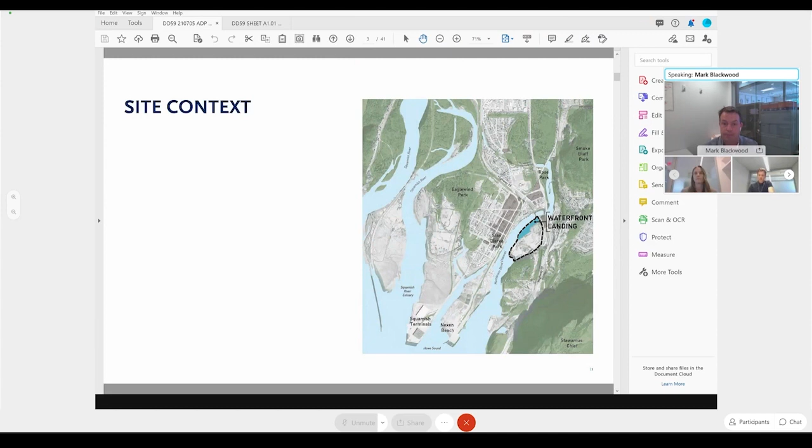Just for some further context, the Mamquam Channel is to the right here in blue, part of the overall community. It envisions an extensive North Park right now, adjacent to the Mamquam Channel, buffering the development to phase 3A, which is in this zone. Phase 2 starts to define the edge of the North Park, phase 3A will continue that definition, and phase 3B and C will complete that edge. This is a very beneficial amenity to the overall community, offering opportunities for outdoor amenity and play for residents of Waterfront Landing and beyond.

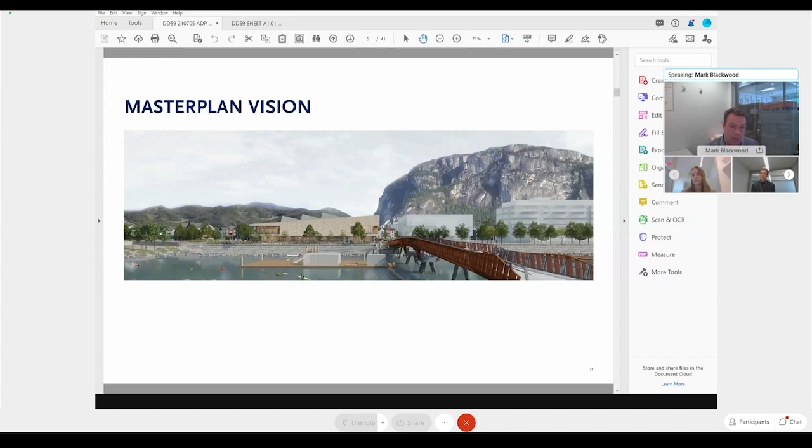Further down on the site, the master plan also envisions a commercial center or village down by the water, with the idea of connecting this development across to downtown - a valuable pedestrian connection for accessing amenities in the larger Squamish area. Phase 3A, which we're talking about, will be just off to the left here.

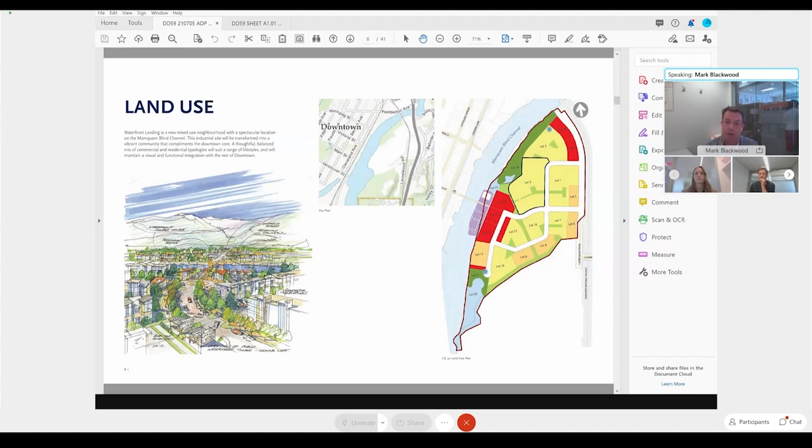Just a little touch on land uses. The diagram essentially illustrates the various uses, red being more the mixed-use type zones, the peach color more the mid-rise type developments, and the yellow more the low townhouse, duplex style of development. There's a lot of mixed use down by the commercial area, and the bridge connection which comes across into downtown.

As mentioned, part of the master plan envisioned how connectivity is going to work through the site. With each phase, we're considering connectivity, both major connection points through the site to the village, but also all the tertiary ones that weave through the various phases of development. We'll touch on how that's been addressed in phase 3A here.

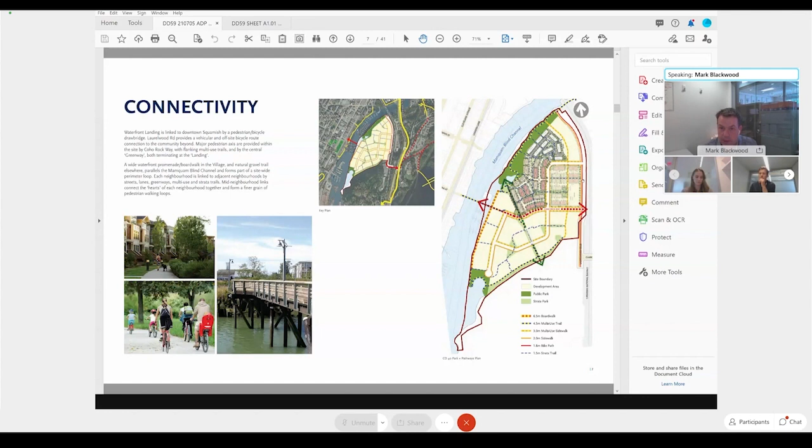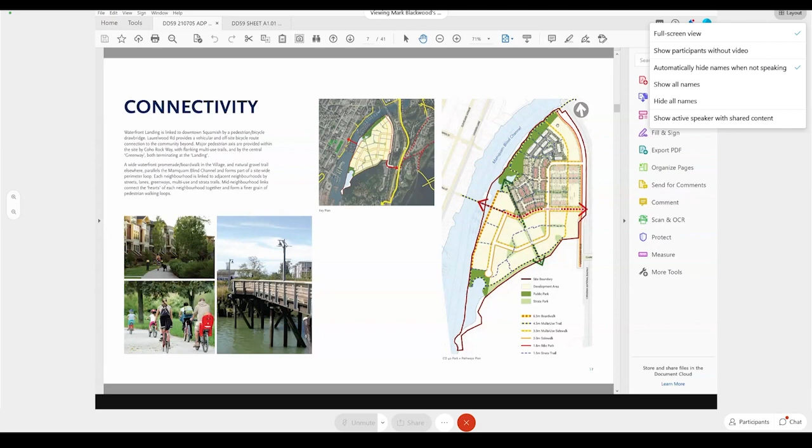For orientation, we have phase 1, phase 2 currently under construction, and the topic of today, phase 3A, which is this smaller parcel right here. The future apartment buildings will be in this zone.

From the early days of the master plan, there were essentially four quadrants envisioned. One is the Woods, comprising phase 1, phase 2, and phase 3. The idea is that each neighborhood would have some distinction in terms of architectural character, but ensure they speak together as a united and cohesive community.

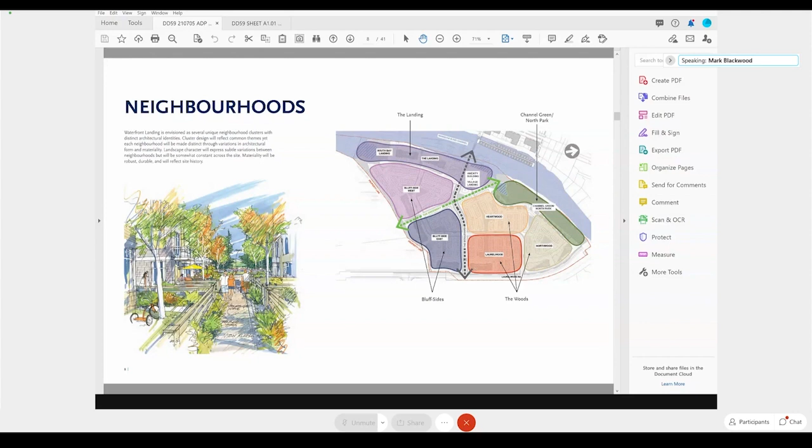There's additional neighborhoods - Bluffside East and Bluffside West - which create opportunities for uniqueness in architectural form and character, while anticipating ways to make sure the community holds together in terms of form, character, connectivity, and public outdoor space. The fourth is the Landing, which comprises a lot of the commercial village, residential, and a large amenity building planned for this location at the heart of it all. So there's some rationale behind how the overall community is intended to come together, thinking about different precincts within the overall site plan.

This slide describes those various precincts, and what we're talking about here is the Woods neighborhood, which comprises phase 1, 2, and 3. It touches on a lot of what I just spoke about, but also some design influences of the Woods neighborhood - this idea of the former sawmill, lumber and log storage, and that slightly more industrial aesthetic that goes along with a previously industrial site.

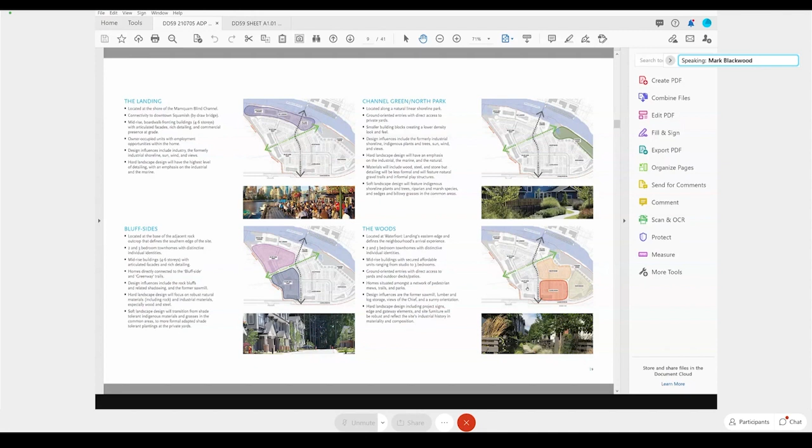As we go through the slides, you'll see the revised plan where we've introduced wider side-by-side units at both ends of building 9 and both ends of building 8, which allow for side-by-side garages. The other plan adjustment is to the internal strata road, which now allows full-length driveways for buildings 5, 8, and 9.

That effectively means the only units with interior tandem garages are buildings 1, 6, and 7. The remaining units already had full-length driveways. That was one plan change you'll see, especially when we get to the landscape plan.

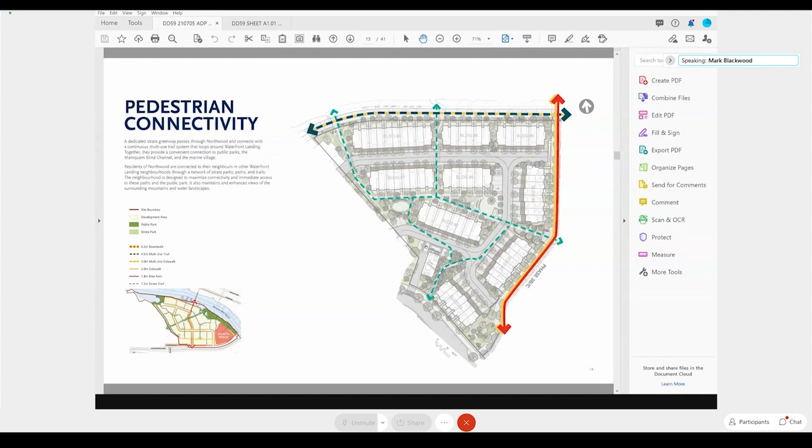Just highlighting that pedestrian connectivity—this one has been modified to create a connection through here. That'll show up better in the landscape plan. I've already really spoken to this one.

The other point to discuss is color distribution. As mentioned, we're carrying forward a similar color palette to the previous phases, which goes back to this idea of creating connectivity in the Woods neighborhood. However, we're creating some distinction as well.

And because it's a smaller development, we also didn't want to overdo it in terms of the number of color variations—at some point we begin to lose the architectural intent of the design.

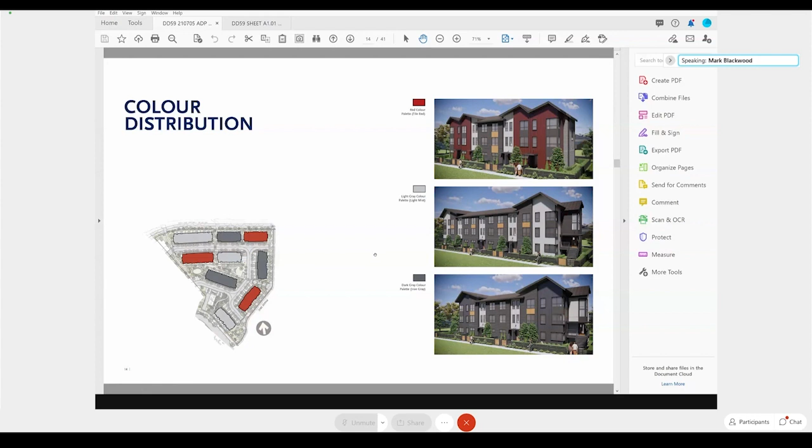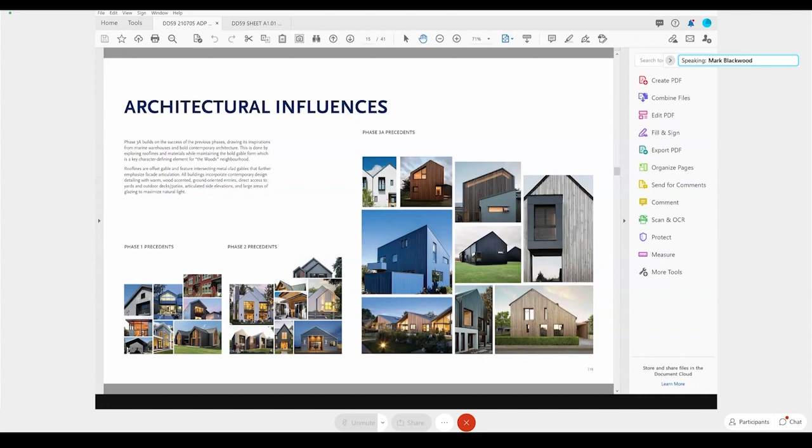To further touch on the design evolution: phase 1's gable roofs that are symmetrical were a predominant feature on phase 1 and phase 2. Phase 2's big distinction from the previous phase was the larger carve out of windows and paneling. Now in phase 3A development, you can begin to see these layered offset gables, carrying through the industrial language of the corrugated metal and the punched openings, and introducing more of a panelized siding, which is a new material we're using more extensively on this phase.

Just similar comparisons of how the design is evolving, and I think it's quite clear that there is distinction, but there's also some cohesiveness in terms of these different communities residing side by side, not necessarily wanting them to be too drastically different.

One of the other points that was raised was buildings 1, 6, and 7, which are adjacent to the Central Park, and some concern of whether there's enough feeling or frontage or sense of entry off of the park.

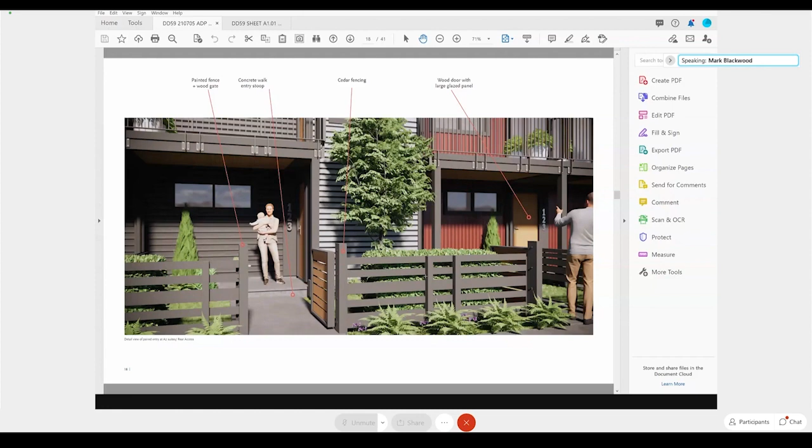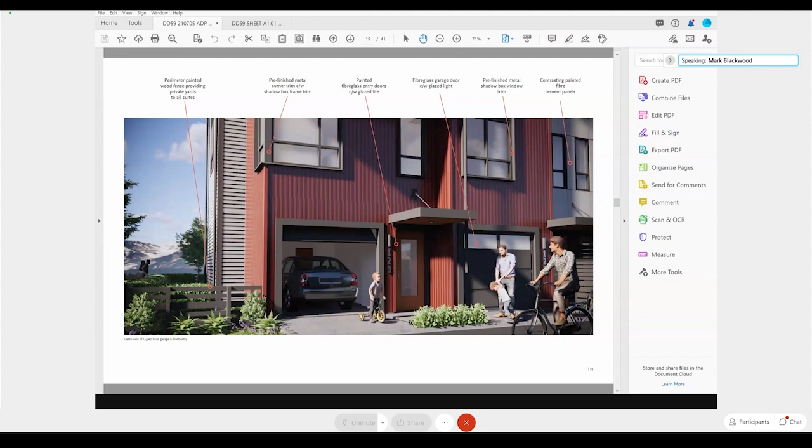On the opposite side, with the reduced driveway length, we can still create a transition from the front door to the curb edge. As I'm sure you can understand, if we were in a zero condition where we had zero driveway apron, we would pretty much be stepping out of the front door onto the strata lane, which I believe is a bit problematic.

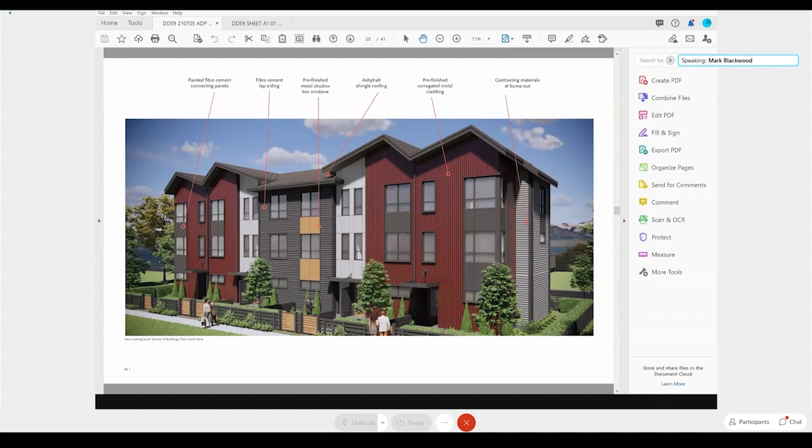Just some various images of various buildings and how the material palettes are being handled. I think in many instances there's a fair amount going on in terms of variation - it does vary from building to building, but I'm cautioning against too much additional color, as I think we would lose the intent of the overall design.

This is a view of Building 5, the rear of Building 5, where the color palette is a little bit more muted, but still varied in terms of siding color tone and some pops of color.

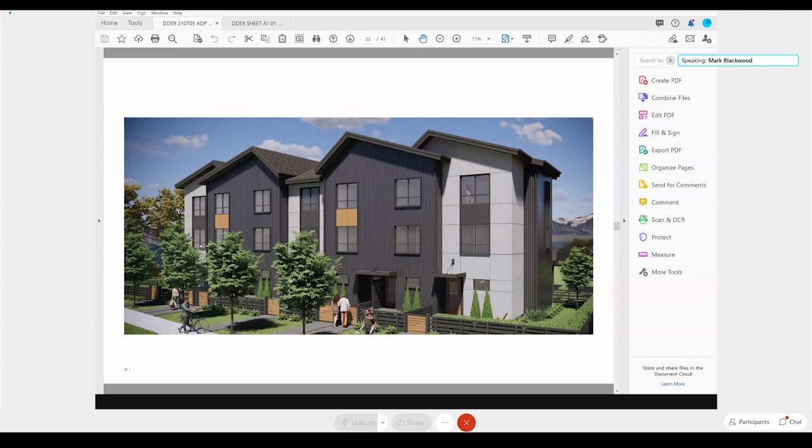This one here - sorry, just go back - we have building number 2. This illustrates the darker corrugated metal and the introduction of a more painted fiber cement, defining the ends or the field of the building, and really using the corrugated metal as the pop-out feature. Just the rear.

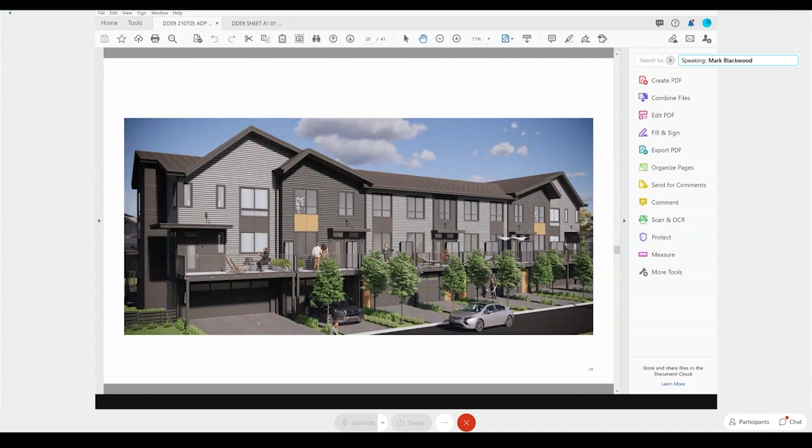Just various color palettes, I'll scroll through these. This illustrates - so this is a view of building number 9, where we've added the wider units. You can see the side-by-side garage, full-length driveways, so now we're trying to address some of those concerns over too much tandem parking.

And as mentioned, the housing diversity piece includes a fair number of unit plans, ranging from just over 1,000 to about 1,500 square feet. The idea, as Paige mentioned, is to offer a smaller unit type to address some market concerns, and also create a varying degree of 2 and 3 bedroom and den type units.

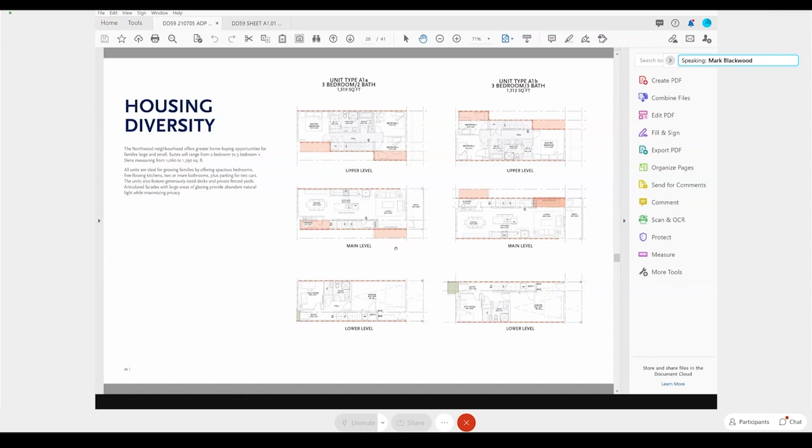So all these are in your package. And you can see here, these are the only tandem units, which are in buildings 1, 6, and 7. So 2 parking stalls at the lower level, and then the entrance off of the strata lane.

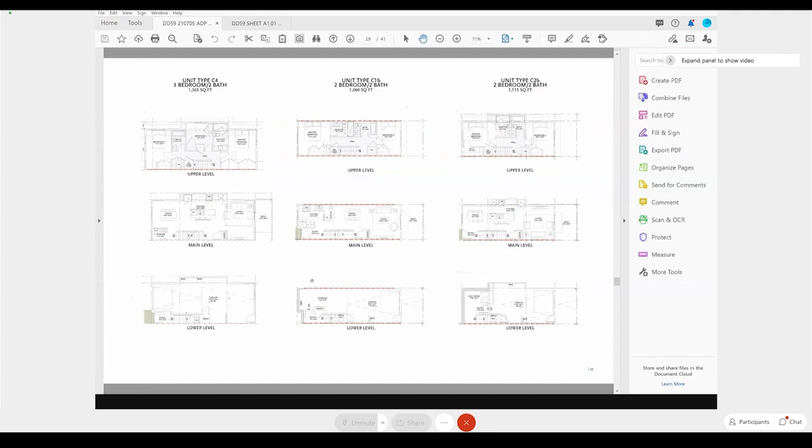I'm just going to scroll forward quickly before landscape jumps in, to highlight the connectivity piece I was talking about. As we saw in the previous plan, this pathway was extending to this intersection. That's since been modified to come in front, since there's an existing pump station here. So now we're keeping people off of the Strata Road, with just one point of crossing to the park, creating a nice convenient access out to the North Park here.

In this version, you can now see the wider units on the ends of building 9 and building 8, with side-by-side garages. And now you can see all of these buildings have full-length driveways. Buildings 6, 7, and 1 now have very much reduced driveway aprons, more or less non-existent, being about 4 feet. So that addresses concerns about anyone trying to park in those locations.

And that puts the decks on the park side, which creates some nice overlook and eyes on the public park space in the middle. So yeah, just wanted to highlight those bits on the site plan. I'll go back and maybe let landscape take over.

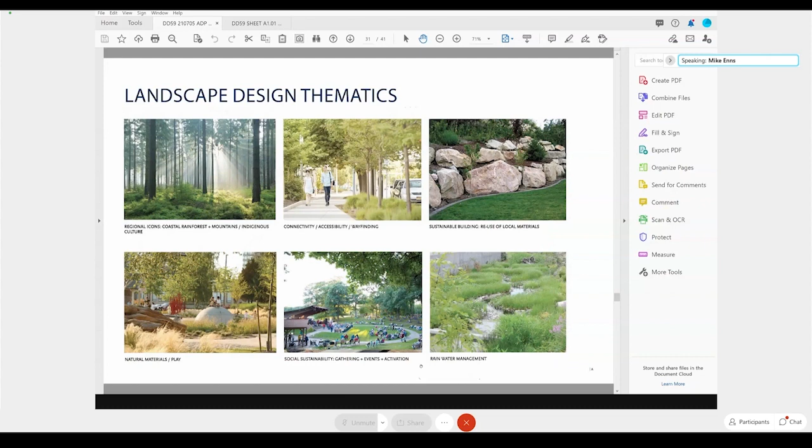So, Mark, if you just keep going through there. Mark did a good job highlighting connectivity, permeability, lots of options to move around. Generally, the approach to landscape was lush, evergreen, native planting palettes in between the building masses in and around the mews, and the public realm is anchored by three key spaces: the central greens, the pocket park, and the little forest walk down on the south edge.

We talk a bit more about those later on. And obviously the perimeter aspect ties into the neighboring waterfront park, as well as the Greenway Trail, allowing a good amount of privacy between those public spaces and the private units, but also permeability through those sites with lots of different access points.

Next slide, Mark. Maybe I'll just highlight as well, while we're here, Mike: we have a staired access to the park here, but one of the important elements of the site plan and the multi-use path was an accessible entrance into the site at this lower portion as well, ensuring we have a good accessible path of travel from the phase 3B and C sites and the North Park into the 3A development.

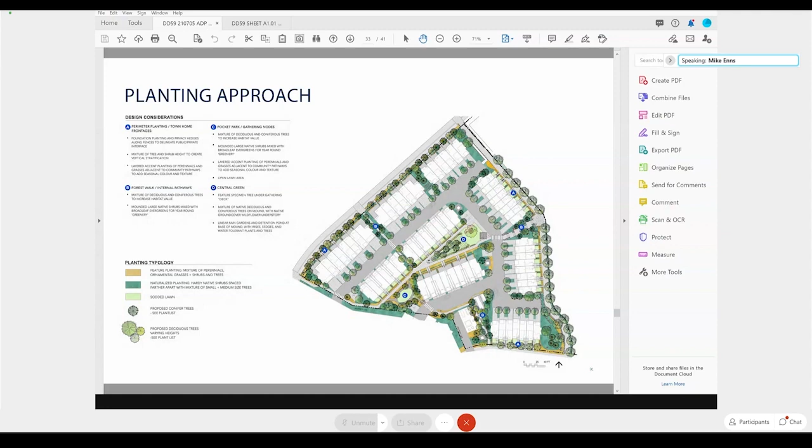Plant list: in general there's a good mix of native shrubs, some hardy shrubs that do very well in the region. We have some drought tolerant plants as well, and this has been vetted for essentially bear proofing, so most of the plants here won't attract unwanted visitors in and around the site. That gives you an idea of our palette, a good mixture of deciduous trees and conifers with evergreen shrubs, perennial accents, and ornamental grasses.

Quickly, a couple of blow-ups of some components of the public realm, the amenity spaces. This is the reconfigured pump station area that basically takes you from the south edge of the site heading west along that pathway.

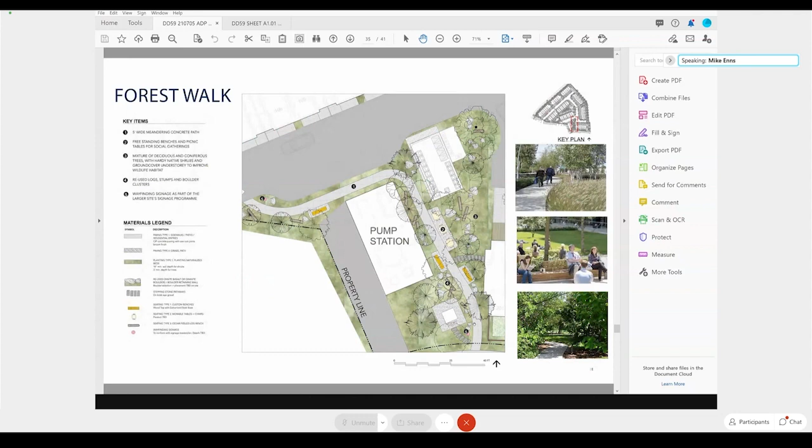Connecting to the waterfront park to the north. As Mark said, the pump station is there, and the garbage recycling kiosk was shifted to the right so we could have the pathway come through along the internal street. We thought this was a very cool opportunity to create a small forest walk with picnic and seating amongst a heavily treed area, with naturalized features such as logs—a neat little amenity as you proceed through these pathways and out along the west side to the waterfront park.

Continuing west and north, you'll come across the Pocket Park, really another little jewel along the pathway. It's a fairly unprogrammed, flexible green space—open lawn with perimeter seating and a heavy dose of native planting—just a place for picnicking, bringing your pets or kids, and having fun with unprogrammed flex play, but nothing permanent and no fixed playground equipment in this area.

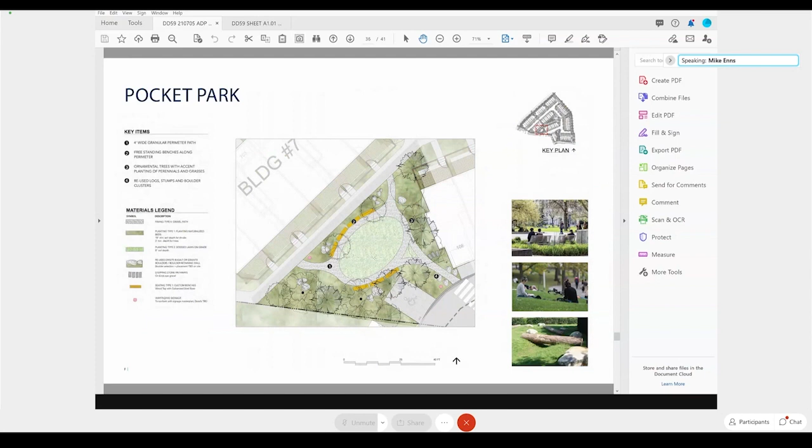Moving along to the central area, this is the social heart of the site. On the west side there's a built-up mound, and on the far west side there's actually a proposed little rainwater retention, seasonal pond, with some stepping stones over it and a little plaza.

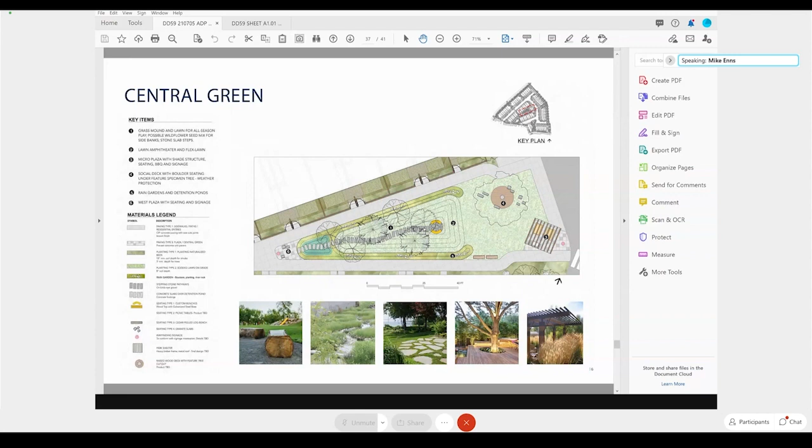Proceeding eastward, you go up the mound to a little lookout area that overlooks the social area on the east side of the park, with a grass amphitheater, a featured tree, sitting opportunities around the perimeter, terminating at a covered picnic barbecue area and some signage at the base of the grand staircase. There are connections on either side, and this would serve as the social heart and perhaps event space for the immediate community.

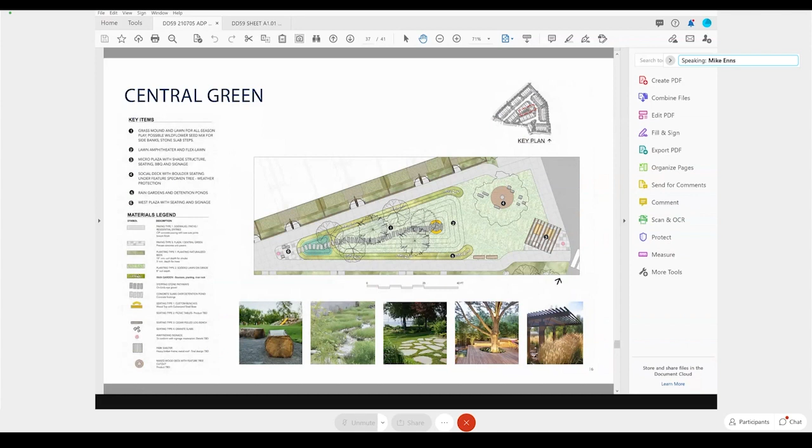So the mound and the lookout, then an amphitheater down and some free play—no fixed playground, as Carrie mentioned. The approach here was to keep things naturalized and let kids and people of all ages use the various elements, more of a natural, explorative approach to recreational design, but keeping things fairly flexible and passive, with room for events on the east side open lawn area.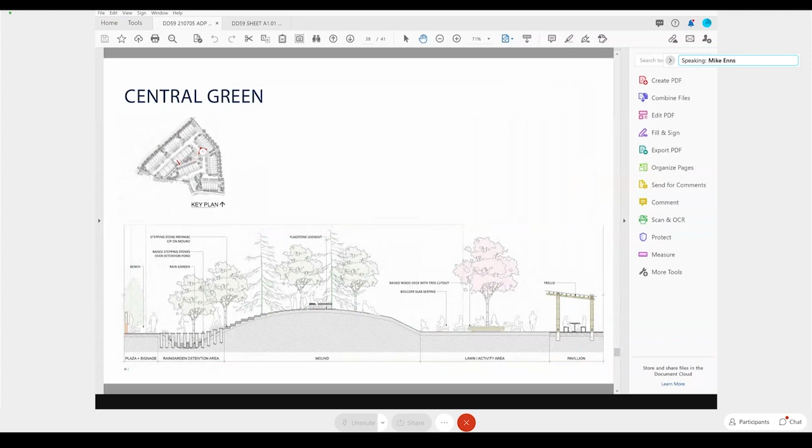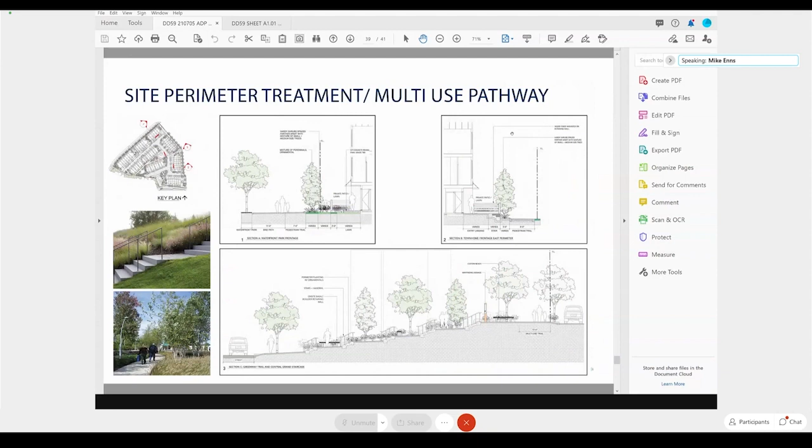Perimeter treatment, multi-use - so we've got a couple perimeter shots. I think the top left is the waterfront park frontage. We've got our multi-use path, and Mark showed some 3D perspectives of how that transition is from public to private, with a layered approach of plants and deciduous trees building up to the fence, and then the private patio spaces internally.

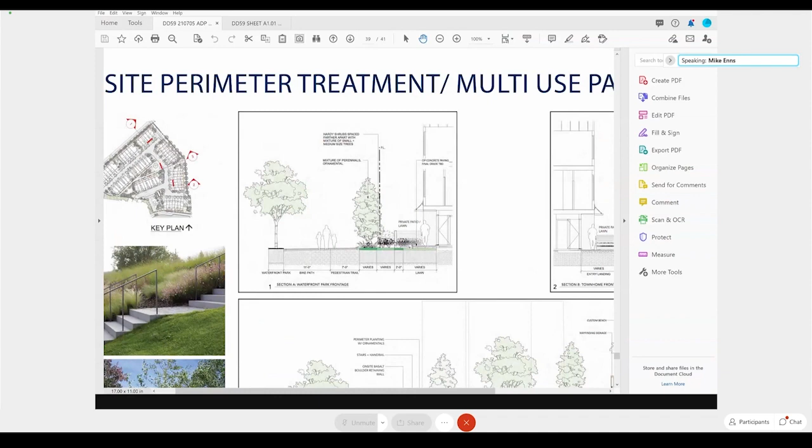I think the bottom section is the grand staircase coming from 3B and C on your far right, with the landing up top and some seating and signage, proceeding down to the central green commons area. The number 2 on the top right is another section through that Greenway Trail, stepping up to the townhome frontage. The townhomes are nicely nestled into that escarpment.

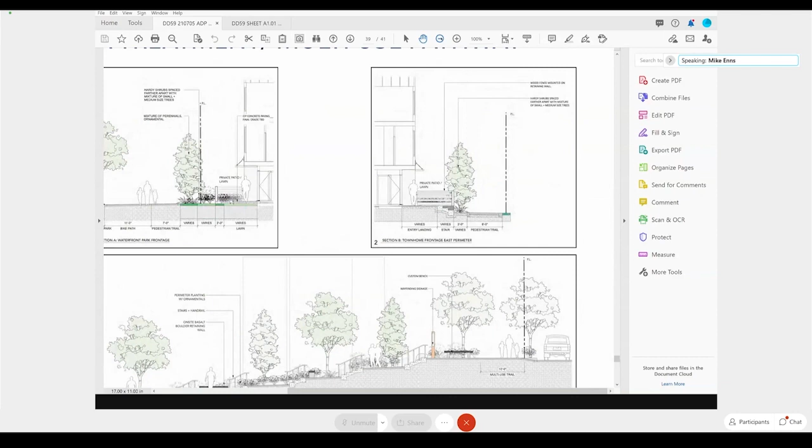Next slide. Furnishing palette - again, naturalized material: stone, wood, durable. A lot of these materials have shown to be good choices with great success in the earlier phases, and phase 1 is almost complete, so we're carrying over some of the materiality for continuity through the phases.

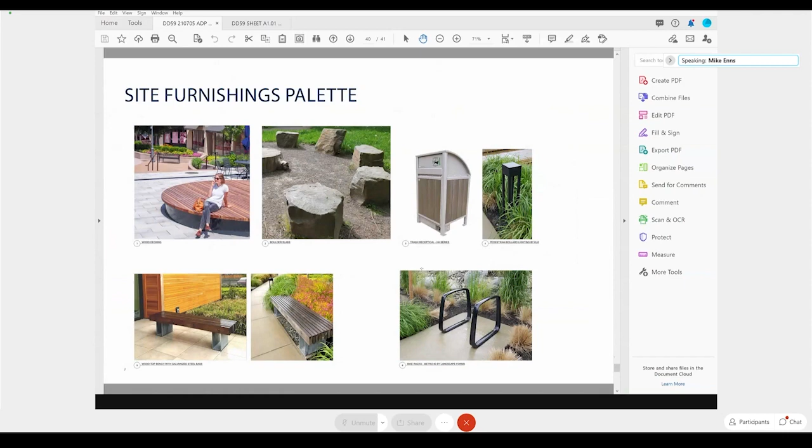Next slide, Mark. And lighting - Carrie, you mentioned the uplighting, and that has not been adjusted. We can certainly eliminate some of the uplights, especially for a project like this. The main strategy is at the entries on the perimeter, make things illuminated for safe wayfinding throughout the site, especially on the main staircase coming down from the right. In the landscape, it's probably best to highlight certain groves of trees or landscape elements, but not inundate it with uplighting. I agree with your comment, and we welcome any other comments on that, but that's our approach for now - to reduce this and be more selective with the lighting.

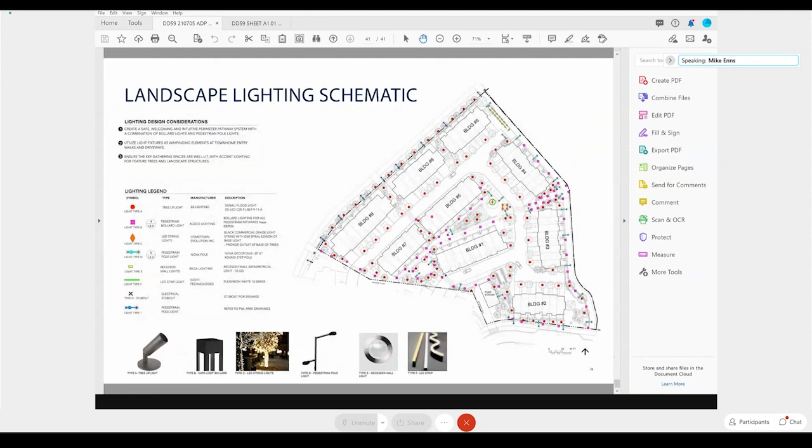I think that might be it - is that it, Mark? Yeah, that's the last slide. Okay, thanks.

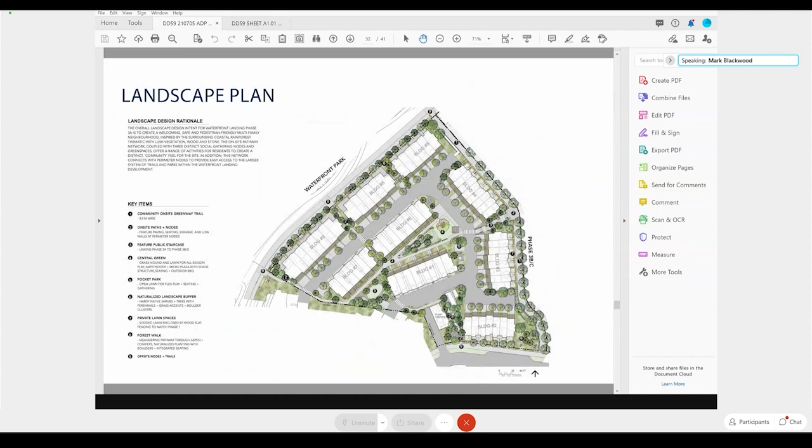How many units would you lose if you did provide adequate driveways? Well, I think the main thing - we've adjusted buildings 5, 8, and 9, so it really puts the squeeze on 7, 6, and 1. I think we have a building separation of about 25 feet right now at the pinch point. So rough math, if we're at 4 feet now and need to get up to 20, we're taking out 32 feet. So you're more or less probably losing close to a whole building - maybe 7 units out of 65.

This is a bigger question. You've had the benefit of seeing a couple other phases get built out and actually used - have you learned any lessons from the way those ones were used that have been incorporated into this phase?

Yeah, I think maybe that in part might be a question for BOSA in terms of how homeowners are giving feedback to them. But what's really in question here, as it relates to driveways, is just these 3 buildings in the middle. I think part of the concern about tandem garages is someone going to put one car somewhere else. On this site, we've limited the driveway length, so hopefully that won't happen - I'd be surprised to see someone park in a 4-foot apron. After that it becomes a bit of a strata policing issue, to make sure the visitor stalls are indeed being used for that.

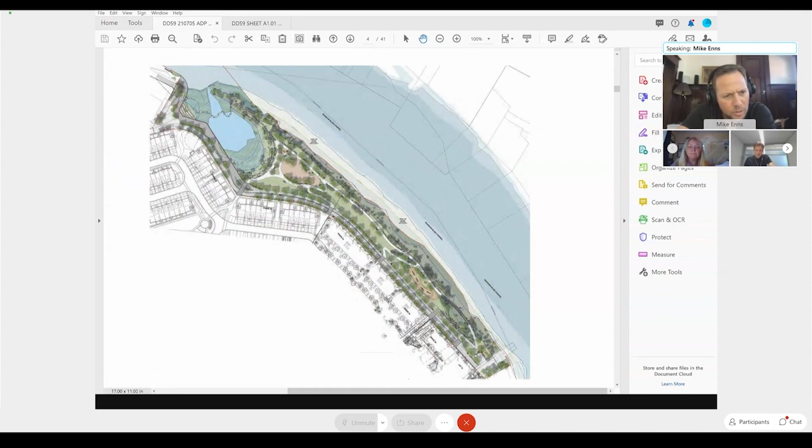Just in reference to the active play question, is there another playground in proximity to this subdivision? Is there one in one of the other phases that's relatively close, do you know? Well, we've got, I know in phase 3 BC in the plaza, there's some active play there, and I think there's a private daycare in 3BC. But Mark, maybe you can speak to that. I don't know the full design for that waterfront park or previous phases, so maybe Mark, I don't know if you know.

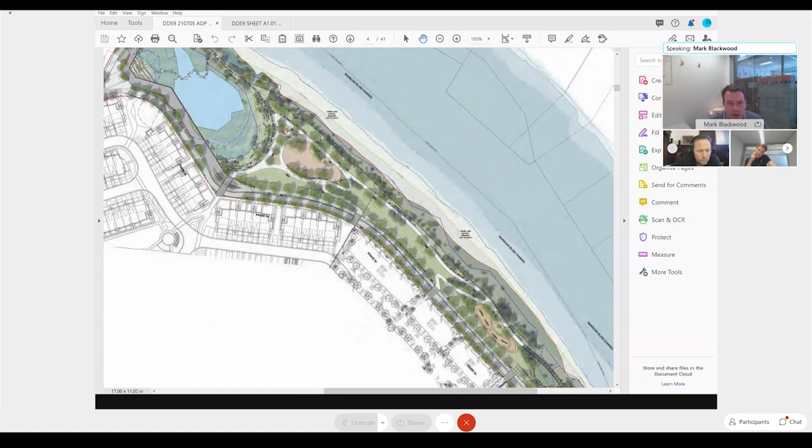Yeah, I'm not directly involved in the design of the neighborhood or the North Park, but I think Paige maybe you can speak to the latest updates on that. We included this slide just to illustrate that there is an extensive park right adjacent with various programmed elements in it. I'm not sure, Paige, are you able to speak to some of the programming there?

Yeah, so where your cursor was, that's exactly right, where there would be active play. And then there's opportunities for all ages at different locations throughout the park for different activities. So we're talking swing sets and things like that, climbers and other elements like that?

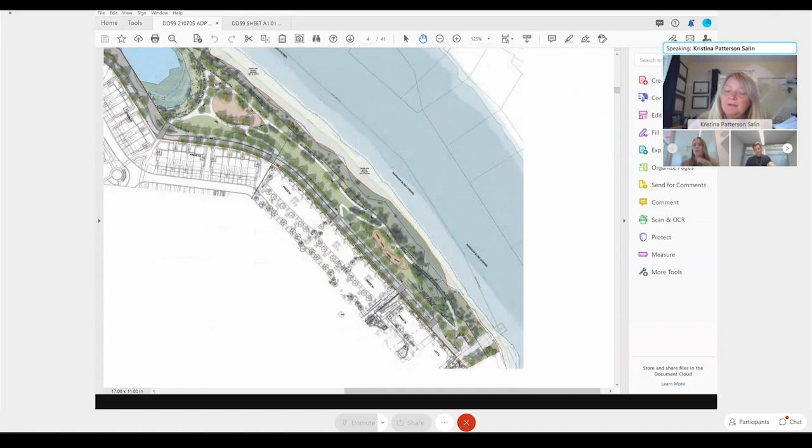Okay, and then the other question I have is the wood slat fence, was that utilized in any other phases or is that unique to this one?

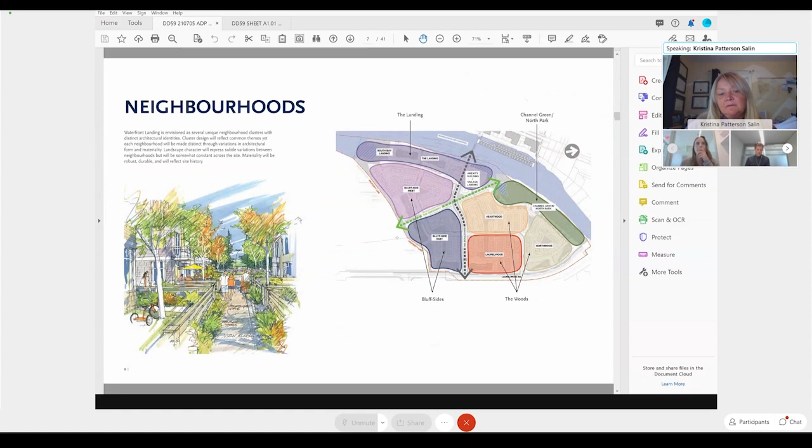That is being used in phase 2. Phase 2, okay, and it's been successful in terms of maintenance?

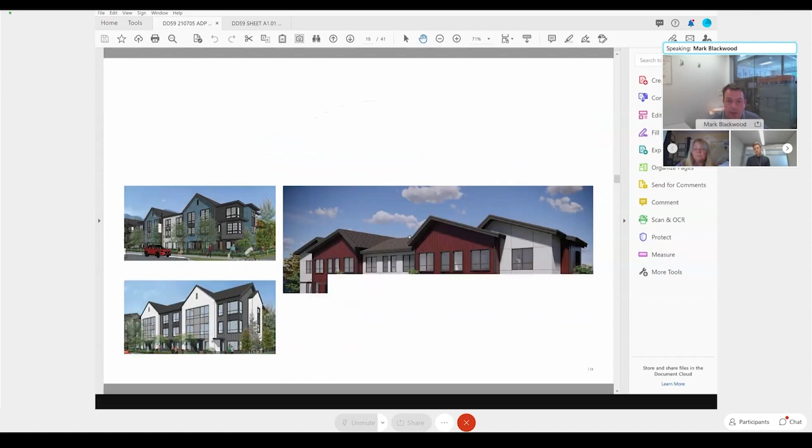Yeah, well, so phase 1 had kind of a solid paint, the dark gray, and then, sorry, I'm just going to scroll back to the site plan. And then on phase 2, we went with the solid painted dark gray for the fencing. And then on the gates, it's not a stain, it is a solid paint essentially. We didn't want to get into a condition where the stain holds up for a year or two and then they end up fading out and being a maintenance item for the strata. So we've used more of a solid paint on those gates, but still to give that sense of wood.

There are a couple ones that are complete already on site, and they turned out quite nice. Okay, that's it for me. Thank you.

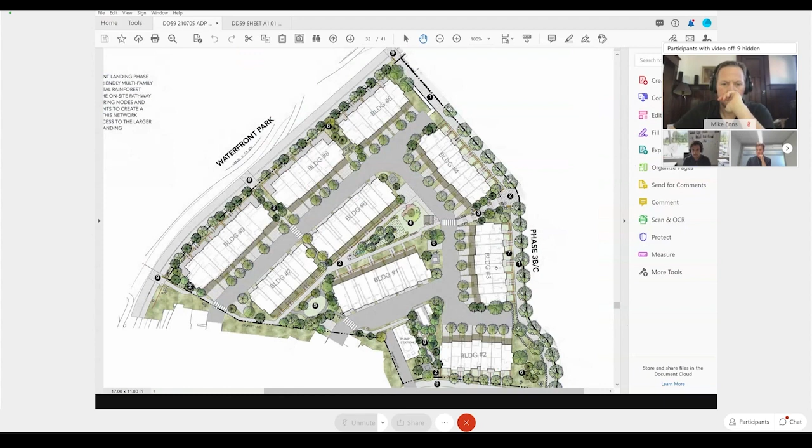I can't hear you. Hello? Is someone on mute? Mark might be muted, or having trouble.

Sorry, did you mean another 2 feet, Luke, so going from 4 to 6? Yeah, I'm wondering if there's any ability to get to 6 feet, and whether there's consideration to add some planting in there to deter people from parking right outside the garage door.

Yeah, we've gone back and forth quite a bit on these driveways, because per the bylaw it states 6 meters or no driveway at all. So we were trying to get as close to no driveway as possible while keeping a design and having some planting in there. To answer your question, we could go a bit longer on the driveway — it's possible, and we could definitely fit more planting in. It has been considered, but we're just trying to get as close to abiding by the bylaw as possible.

The other one would be the color considerations that planning asked us to comment on. A couple of the buildings on the rear were chosen to be a bit more of a muted palette. I was wondering if there was any particular reasoning for that, and if any other colors had been considered at the rear.

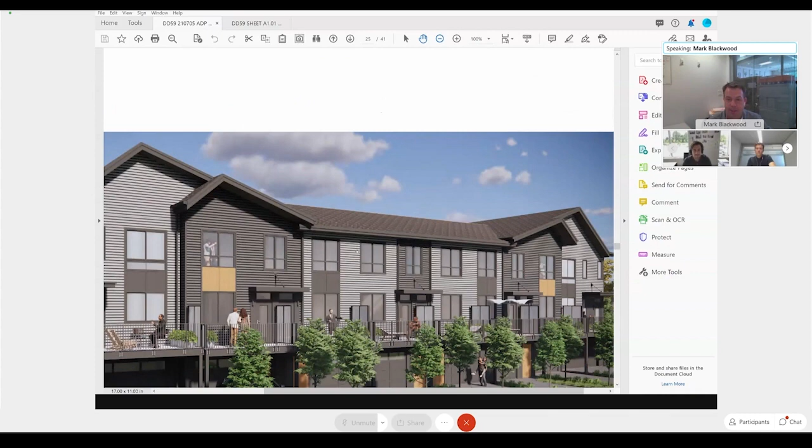Sorry, I lost my mute button there, so I couldn't unmute myself. Yes, that was intentional. If I go back to the rear view, the idea is to make sure that, although this building is kind of seen in isolation, as you'll remember from the color distribution diagram where we're proposing pops of red — the idea is to make sure those buildings really pop.

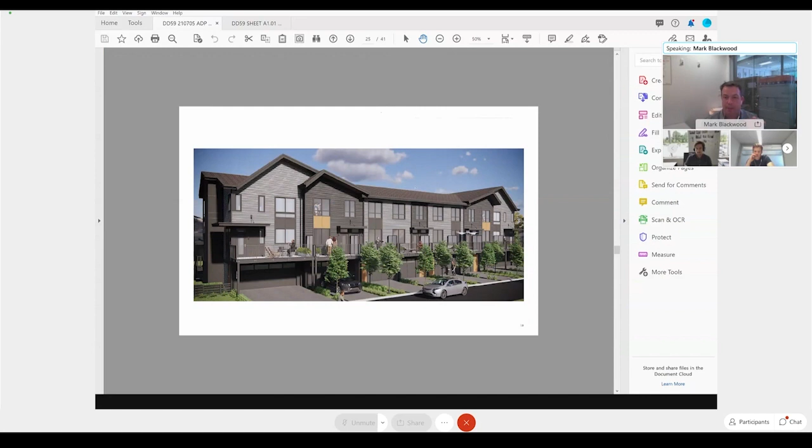I think if you begin to populate the site with too many colors, you lose that aha moment, that special moment of seeing individual buildings pop up against a slightly more neutral elevation. But we made sure there are still some different color tones, some smaller moves of color pops as well. Once you get the layering of landscape and the life that people bring to their balconies, it quite quickly becomes quite busy, so we didn't want to overdo it.

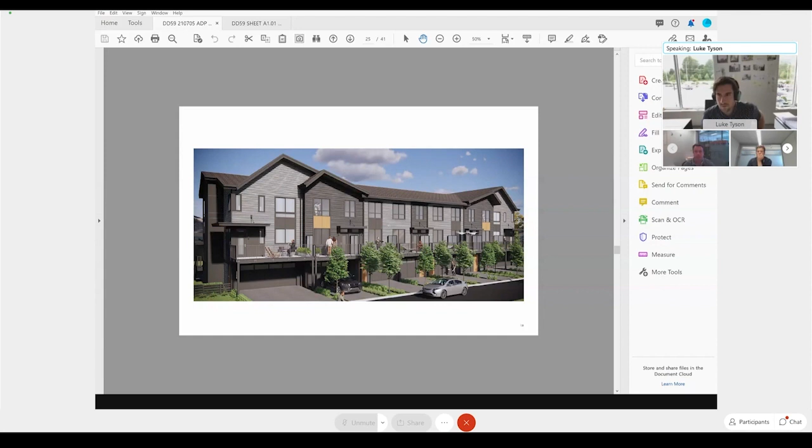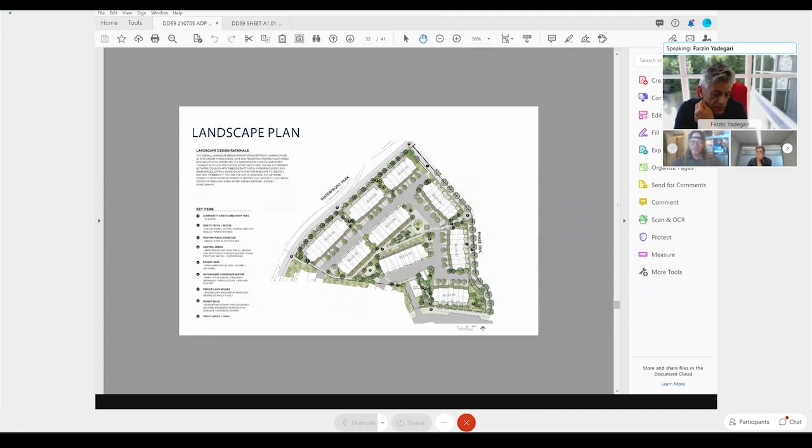Thank you, John. Thank you, Mark, for the presentation. Can you go back to the slide that shows the changes? I haven't seen the previous phases of the project, so I don't really know the colors and materials used before. Can you tell me what's the same as previous and what has changed?

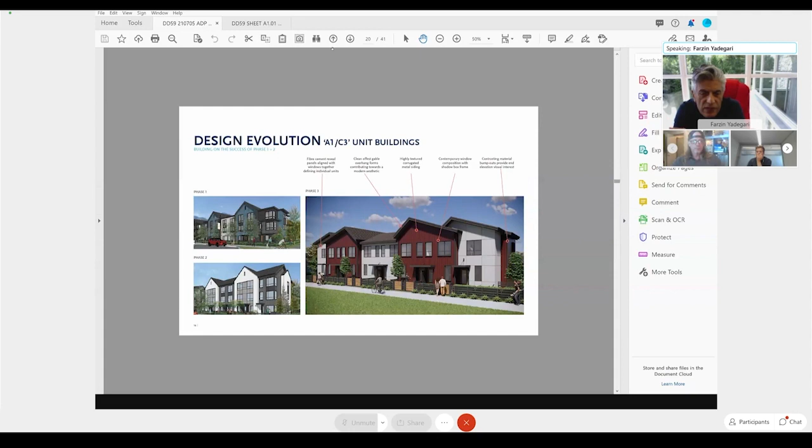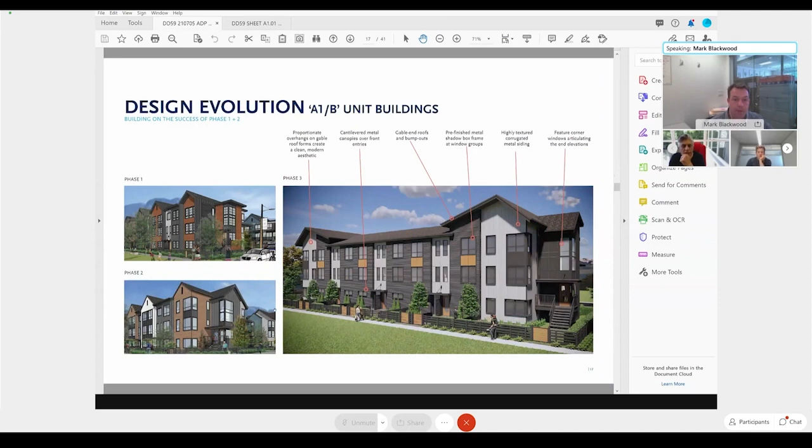Yeah, let's take this slide for example. Top left here — these were the phase 1 buildings. Phase 1 had various colors of corrugated siding. This particular example was blue corrugated, with some accents of gray corrugated on some of the feature bump outs, and most of the other planes were painted lap Hardie siding.

In phase 2, we carried through some of the building form in terms of the gables, but introduced a reduced overhang, so it's more of a clipped gable end versus the more generous overhang on this phase. We also introduced more panel between windows to create a larger expression on the gable ends, and these feature more board and batten siding versus corrugated metal.

As we move into phase 3, we reintroduce more corrugated metal, both in red, dark gray, and also a very light gray color tone, depending on the color palette. In this phase we're also introducing larger planes of painted fiber cement siding, giving the building a cleaner contemporary look with the punched openings we were going for in some of the precedent images. One of the more dramatic changes is the roof line going to more of an offset gable.

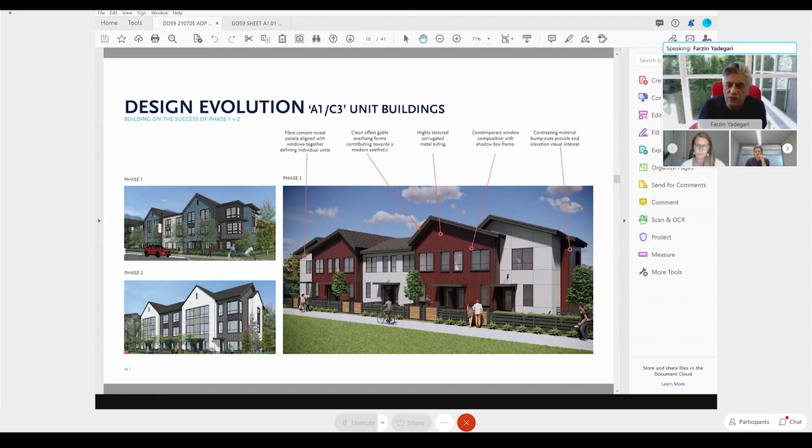Mark, how many of the units range from 1,059 square feet to 1,500? How many of each do we have? We have 65 units, right? Is it majority on the lower size or higher size? What were we talking about?

Let me get to the site plan — that's probably the easiest way to explain it. So most of them are on the smaller side, for reasons Paige was explaining in terms of smaller size and affordability and what the market is wanting there. The larger units, the 1,500 square foot ones, are a bit more limited.

So those are the 2 units on either side of building number 9, and also the 2 on building number 8. When we made that change, it also reduced the number of units by 2 along the waterfront park, which decreased the density a little bit and improved the side-by-side parking scenarios. But it's weighted more heavily on the smaller units, which I think is a good thing.

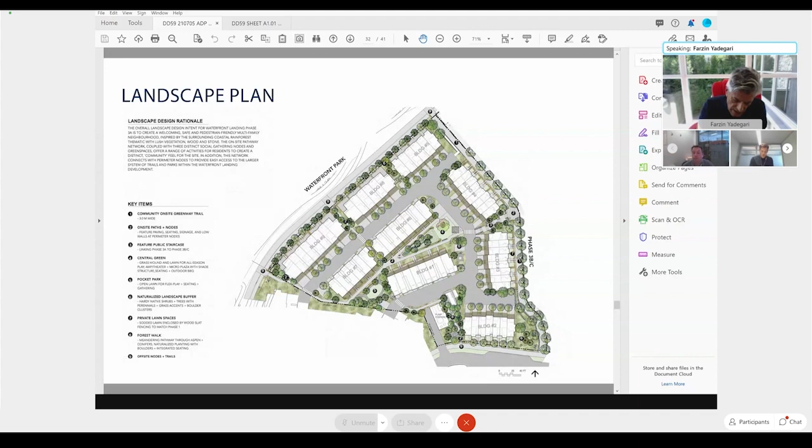Thank you, and I didn't see where I missed it. Visitor parkings, where are they located? I could find a couple, but not many. Let me zoom in a bit here. So we have a lay-by here with a couple of parking stalls. This is where it's proposed the car share would be located. And then we've also got visitor stalls here, hatched in a similar way to the landscaping, so instead of introducing more asphalt, they're dressed up a little bit more. And then there's a stall here, and an accessible stall here as well, and another one over here by the...

How many do we have altogether? What are we, 7 plus the 5 for the car share? Car share? No, for the visitor parking. Yeah, so that car share would count towards our visitor parking count. How many, 7? Yeah, 7.

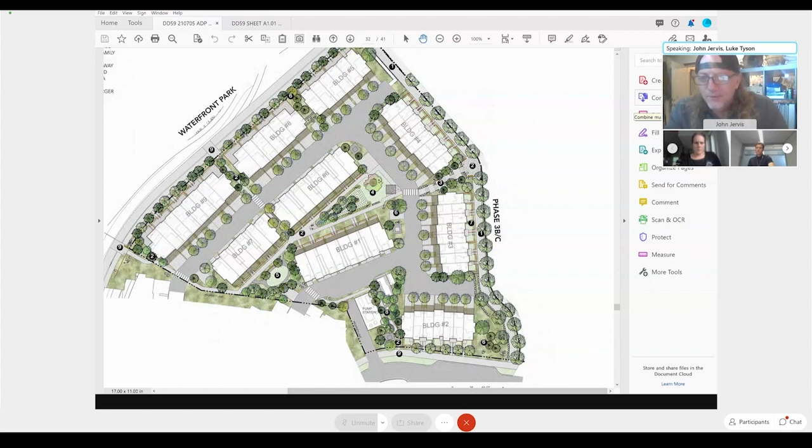And that's all I got. Okay, thank you, Catherine. Anyone else? Okay, sorry, I was going to say one thing - I forgot. Okay, I just missed it in my notes for materials.

I noticed there was a lot more focus on this phase given to Hardie panel than on the others - I think it was lap siding or something similar. I'm not sure which Hardie product is proposed to be used, but I was hoping we could start seeing some better quality materials being used in Squamish, especially when these townhomes are seeing quite high pricing. It'd be nice to see materials on the buildings reflect that. Potentially the Hardie 2.0 or Reveal panel would be better, because you see people coming up with really nice designs and it just gets flashed to death having to flash up all the siding on the edges of the panels. It'd be nice to see a decent quality material going on there. That was basically it.

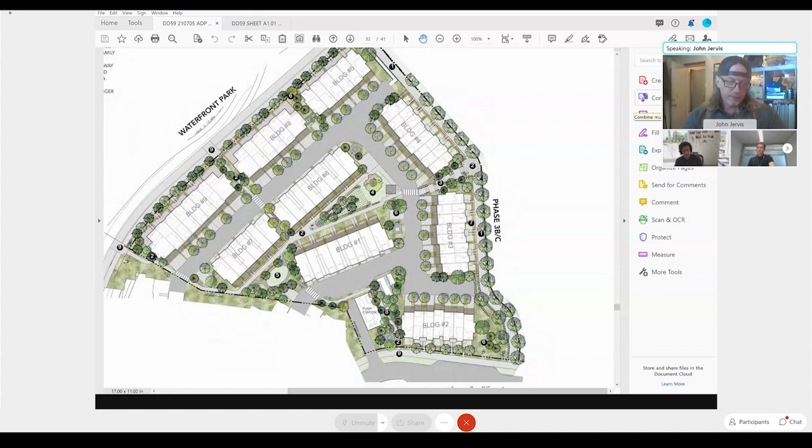Okay, so now we usually go into the recommendations, which I'll read out, and then we'll talk about. Recommendation A is that the advisory design panel supports the project and does not need to see this project returned for further review. B is that the panel supports the project in general and would like the applicant to work with staff to resolve the following recommendations. C is that the panel supports the project in general and would like the applicant to resolve the following recommendations and return to present the revised project to ADP. D is that the panel does not support the project for the following reasons. So open to discussion on some of the key issues and our recommendation.

Anyone would like to comment? Yes, Kareem. I think there are several issues, and there seems to be some consensus on them, but I think a B recommendation would be fine. I think they can definitely resolve it if it's adding one or two more parking stalls, adding some color, or possibly enlarging decks. I think there's enough trust here in planning and in the applicant's team to take it there. I don't think it's necessary to bring them back again, just because I don't think there are enough siting issues. We've been discussing an extra foot here and two feet here, and it's not really, I don't see any huge sort of problematic siting problems here, or problematic siting redesigns.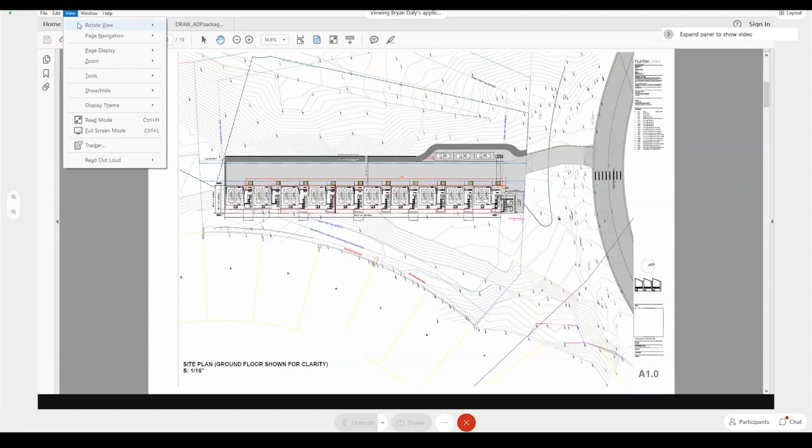Maybe just go to the third slide, Bryan. We can just focus on that one, it's the simplest. Sure. All right, so we're on the third slide here, Chris. And then if you just want me to toggle through, let me know.

Yeah, sure. Hi everyone, I'll try to keep this brief. Julian is beside me, so he can follow up with landscape items that pertain to the sidewalk. But basically, in response to your comments, we worked with Binny and the district, knowing there's concerns about maintenance issues, snow removal, and public access through this sidewalk. But the resolution that satisfied both the district from a maintenance standpoint and engineering would be a 1.8 meter wide sidewalk to the downslope or west side of the Strata Road, and going to the downslope west side of the visitor parking, which is at the north end of the site. And the minutia of how that's going to connect to the boulevard and the sidewalk there will be, I think, worked through with Binning, but planning was supportive of this resolution, and that's hopefully really what we're going to focus on today.

There really haven't been any other significant changes to the project. There'll be a continuous guardrail/fence protecting against falls, and maybe providing some lighting to that sidewalk on the downslope side. We're hoping that probably will stop close to the visitor parking, won't need to go all the way around it. But in general, that's the plan.

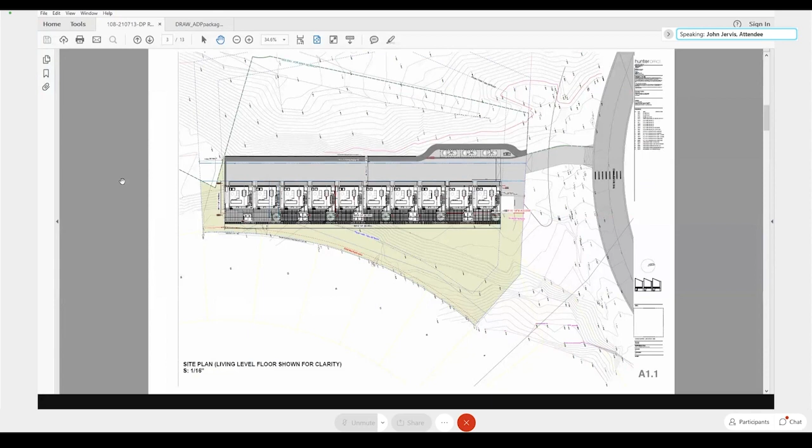Thank you, John. I don't remember this project from March 2021. So if the only issue is the 8 or 6 foot pedestrian pathway, it seems that it needs a plan that is very well designed. So I don't have any comment right now or any question.

Okay, thanks, Farzin. We go to Luke next, please. Yeah, I wasn't at the last one either, but just to echo Farzin, if it was just the walkway, it seems to be acceptable.

The only thing I can see through a quick look at the drawings, a question for you, Chris: is the red line on your site plan a firewall between the 4th and 5th unit? Yep. Could you let me know how you're intending on installing the firewall, or have you not got to that point yet? No, not at this time. Okay, that is all.

Thank you, Luke. Kristina, are you able to question? Hi there, I would just say the access point seems fine.

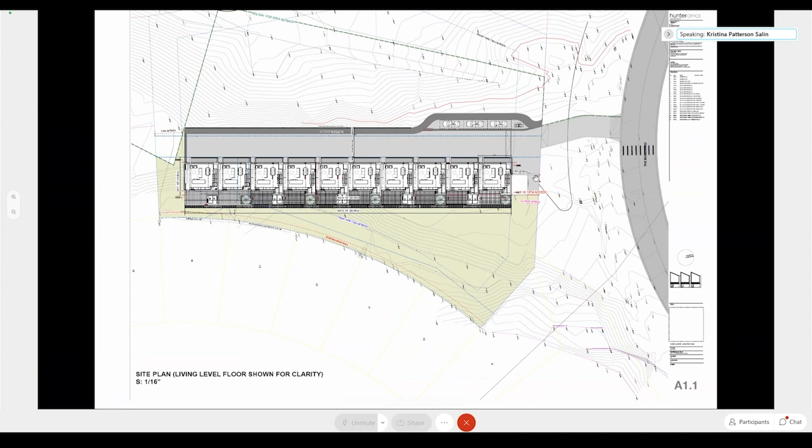I just had one question about the proposed fence material or look. I couldn't see it in the package.

Sure, maybe I'll pass you to Jules. We discussed a few different materials, and I think we're waiting on some feedback from planning from a maintenance perspective, but I'll pass you on to Julian, the landscape architect, who can comment.

Hi there. So yeah, we're thinking it's obviously going to be an engineered guard because it has to be, because of the fall height, so it'll be 42 inches high. But we're looking at various different infills, possibly WebNet, which is a stainless steel mesh infill panel that we could potentially have climbing plants growing up the other side on. We're kind of in the process of going through the fine detail on it, really. So we're between there and stainless steel aircraft cable - those are the two ways we're thinking about things right now.

Okay, that's all for me. Thanks. Okay, thanks, Brent. And we'll go to Kareem, please.

I just had a single question with regards to the guardrail. You mentioned that it stops right before the visitor parking, and I was wondering why that is.